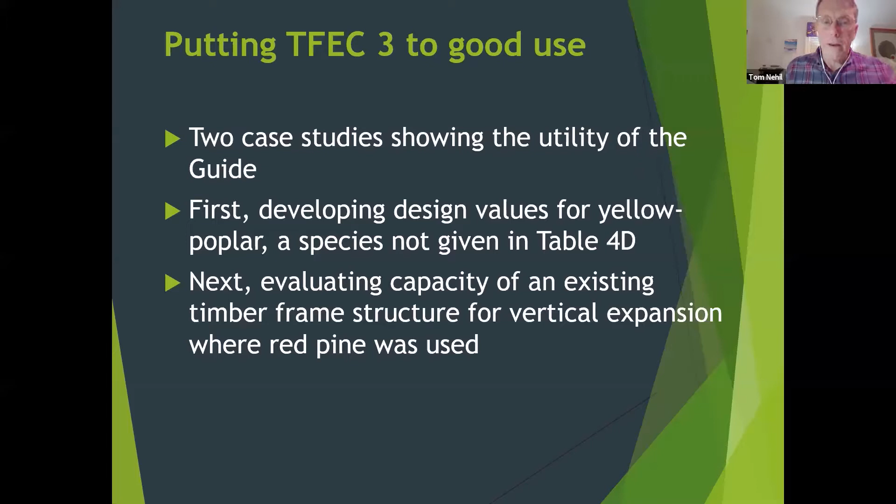Now, the other case study we've got is looking at the capacity of an existing timber frame structure that they wanted to add more load to. It happened to be red pine, although we didn't know that when the project started. So we'll be using some different parts of TFEC 3, I'll call it, in that presentation.

In the first case that Dick will present, we'll be looking at yellow poplar as basically new timber, generic, not yet in use, coming from the mill. We'll leave open the possibility that it could have seasoning. It's not necessarily green, so we'll examine that. Then in the second case study, we'll talk about species ID and grading in situ, and then determining design values from there.

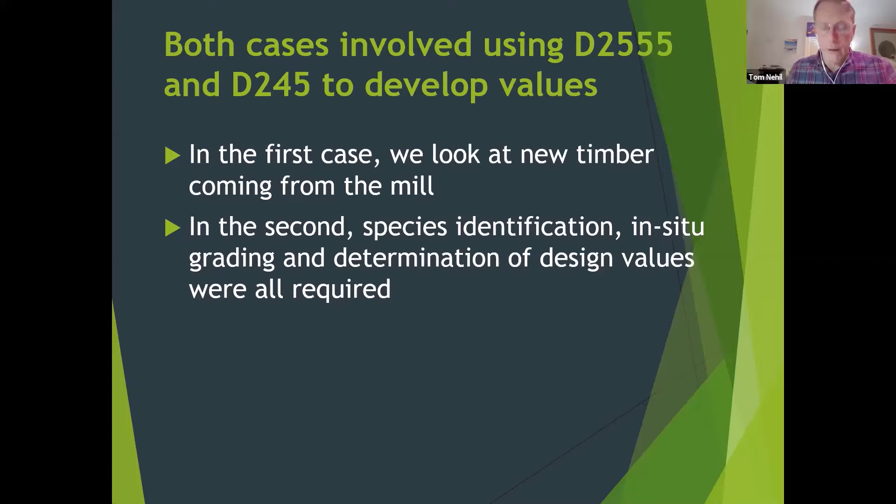So for those of you that are not real familiar with TFEC 3 yet and using D245, let me just set the stage for a minute and provide some structure to our presentation this evening, and then we'll get into the real detail. So D245 is a standard developed by the Wood Committee at ASTM and provides a means for developing design stresses for visually graded timber. And it's the basis for what you see in the NDS supplement. In fact, it's kind of behind the scenes there.

Why we want to use it ourselves is that it, first of all, provides a code recognized way of getting design values for some species like yellow poplar that you can't get in the supplement. So it is a tool for that purpose. Secondly, it allows you to pull out individual species from a species combination. In the supplement, you find most of your various species of wood are grouped together, clumped together. For example, all the maples are lumped in mixed maple. Well, there's hard maple and soft maple, and hard maple's better. So if you know you've got hard maple, this is a way to develop design values that are a little better than what you would find in the supplement.

And then finally, the method of TFEC 3 and D245 gives us a way of taking advantage of the really good quality timber that's often found in these older buildings. So we can get values that are better than Select Structural.

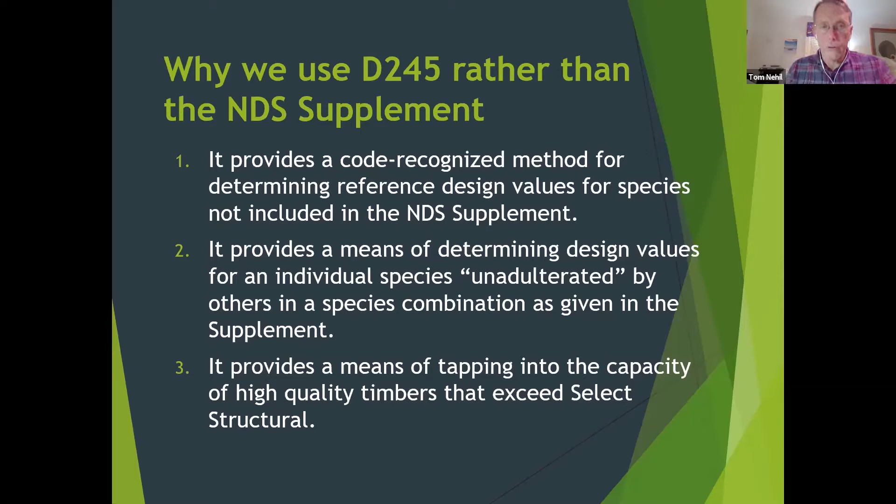So how does all this get going? Well, it starts by having strength values, and the strength values are derived using standard testing methods. And so ASTM D143 is the official test methodology for getting those strength values. This kind of sits there behind the scenes, but it's the basis for doing a whole bunch of testing on a bunch of different species and developing a sufficient number of tests for each species that you are able to get some statistical data. And wood is a statistical material. You know, no two pieces test out quite the same. So fortunately, all that test information has been compiled and reported for us in D2555.

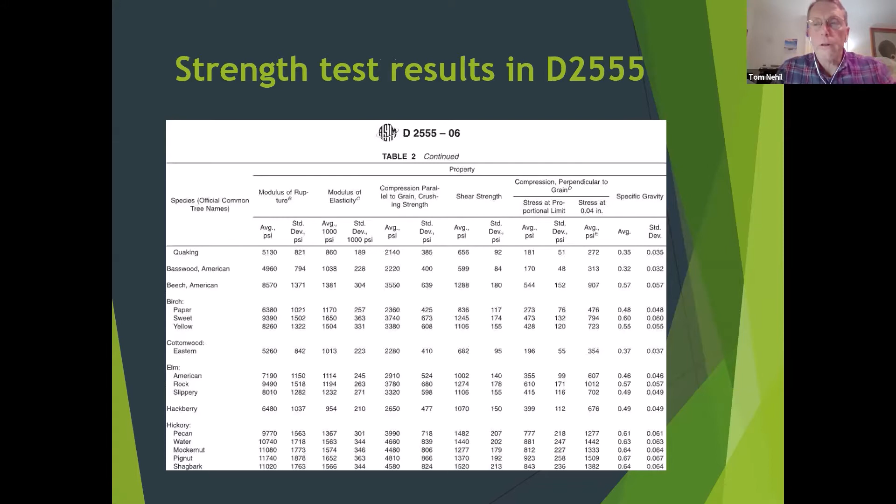So for any given species, you can find the average strength and the standard deviation of that strength value for all of the design mechanical characteristics we're interested in, like breaking, modulus of rupture, shear strength, compression parallel, and so forth.

So then you go to D245, and that basically is your operating instructions. It tells you how to take that strength data and turn it into design values. The rules of that game are kind of messy the way they're presented in D245, in my opinion, but it is basically a simple process. And it's these 5 steps.

You go to D2555, you get the strength data for the particular species you're interested in. Maybe it's basswood. With your average and your standard deviation, you're able to calculate the 5th percentile exclusion limit, which is kind of that lower bound of strengths that were found in testing. And that's what we use to develop our design values.

From there, you apply an adjustment factor to adjust to normal load duration and get some safety factor in there. Step 4, we apply strength ratios to account for grade characteristics like knots and slope of grain. And then finally, if there are other modification factors that apply, we can use those if it's for wet service conditions or size factors and so forth. So that's the framework of using D245.

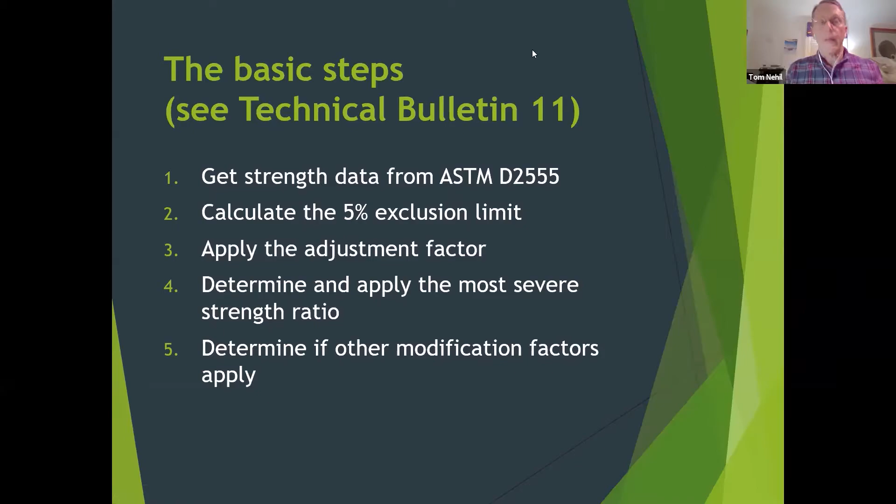And now Dick can take us into some of that real detail and show you all how that can be put to use. So Dick, I'll let you share your screen and take it from there.

Okay, thanks, Tom. Can you see my screen, Tom? Yes, I can. Thanks. Okay, good. I assume everyone else can then.

So, yeah, ASTM D245, pretty compelling reading. Do it during daylight. But it is important, if you're going to follow this process, that you understand what's in 245. And as an introduction to that, I would encourage you to look at the Engineering Council's Technical Bulletin 11, and you can find that on the Guild website.

So my motivation for getting involved in this process was several years ago, I was called upon to evaluate barn timbers. It was no longer a barn, it had been disassembled. A client wanted to move it from Indiana to Colorado and put it up as an event center, a wedding barn. So we're looking at somewhere between 100 and 125 pieces of timber.

And I read Tom's Technical Bulletin 11, and I saw Tom's presentation on this method he developed when he presented at the latest Mount Hood conference. That was like 3 or 4 years ago, and concluded it's a detailed process. It's not real complicated to do one stick, but if you're going to do 120 of them, you're going to need some automated method for organizing it. So that got me involved.

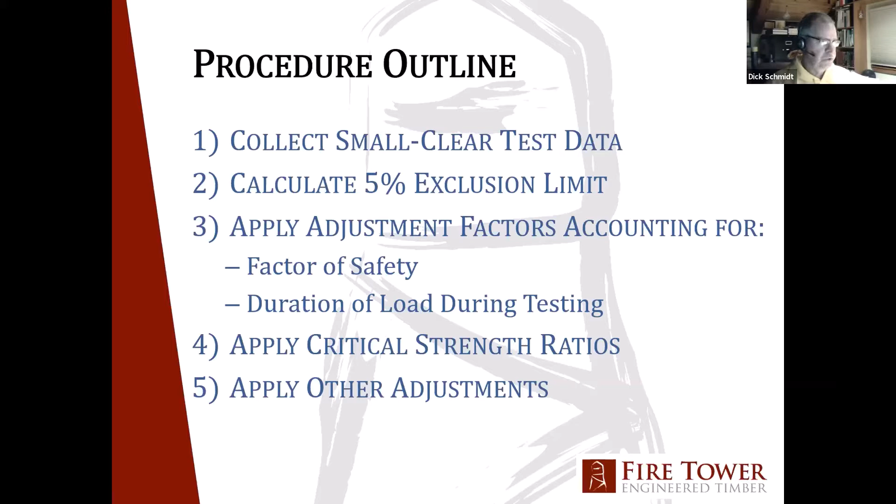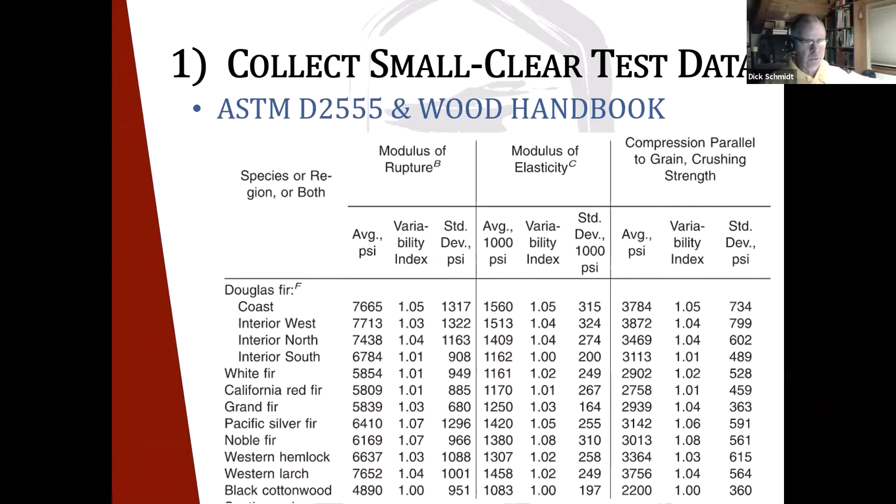So again, here's your sources for the small clear test data. Focus on the average value and the standard deviation. Those are the two numbers that you need for each of the material properties: bending, modulus of rupture is bending, modulus of elasticity, compression parallel, compression perpendicular, shear.

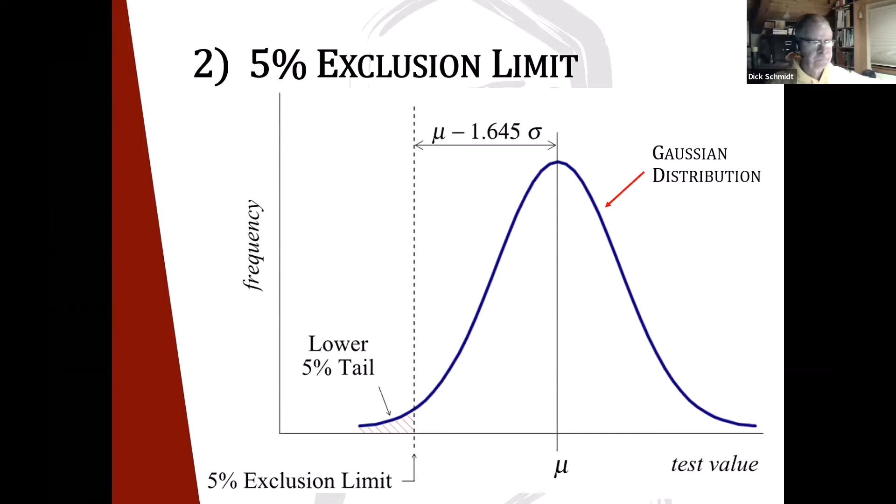Apply the adjustment factors. These are in D245 table 8. And for softwoods, for bending, we divide by 2.1. Divide our 5% exclusion value by 2.1. For hardwoods, divide by 2.3 for bending. For modulus of elasticity in bending, we divide by 0.94, which actually increases the value.

And that's due to some peculiar characteristics of the test procedures, the small clear specimen span to depth ratio versus a typical bending member. And then you can look at the rest of these when you are reading D245.

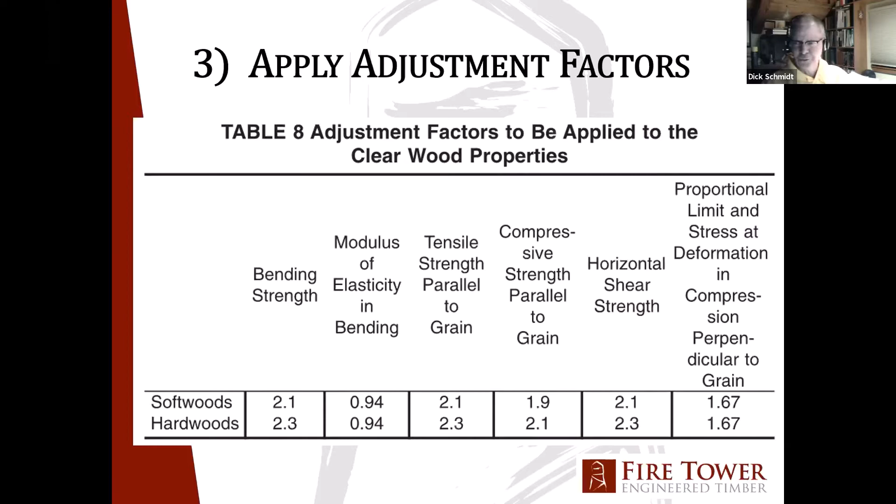Apply the strength ratios for knots. Table 2 in D245 has strength ratios. For instance, if I'm looking at knots on the narrow face of a bending member, I've got a 4-inch wide member and a 1-inch knot. My strength ratio is 78. And what that means is 0.78 is a multiplier that I use on my design value. Or I've lost 22%. The knot has reduced my capacity to 78%.

These tables are a nuisance to try to use in any automated fashion. But fortunately, the annex has equations that give you roughly the same values. So X1.1 is knots on the narrow face, and the equation we use there is shown in blue there for a 1-inch knot on a 4-inch wide face. I calculated 78.1, so essentially the same number.

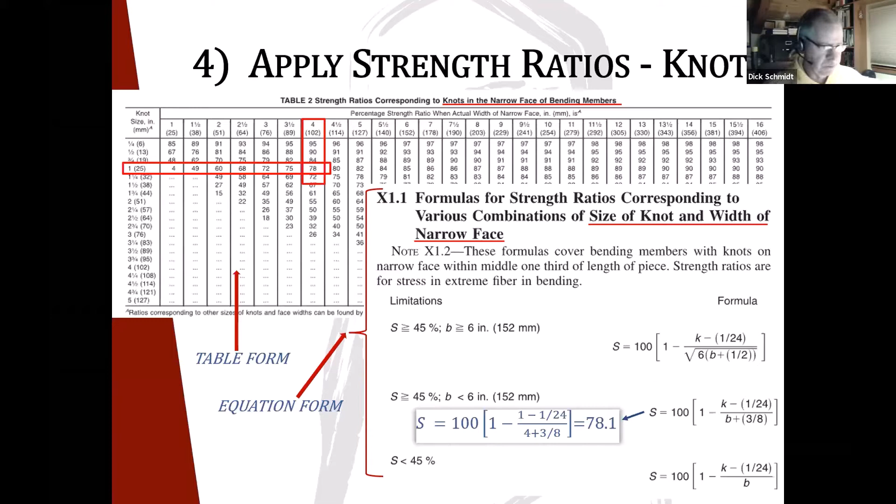The strength ratios for slope of grain are listed in table 1. And for a select structural beam and stringer, the greatest slope of grain you can have, or the limiting slope of grain, is 1 in 14. The strength ratio for bending is 74, and for compression parallel to grain is 87. So very similar to the knot size number for select structural.

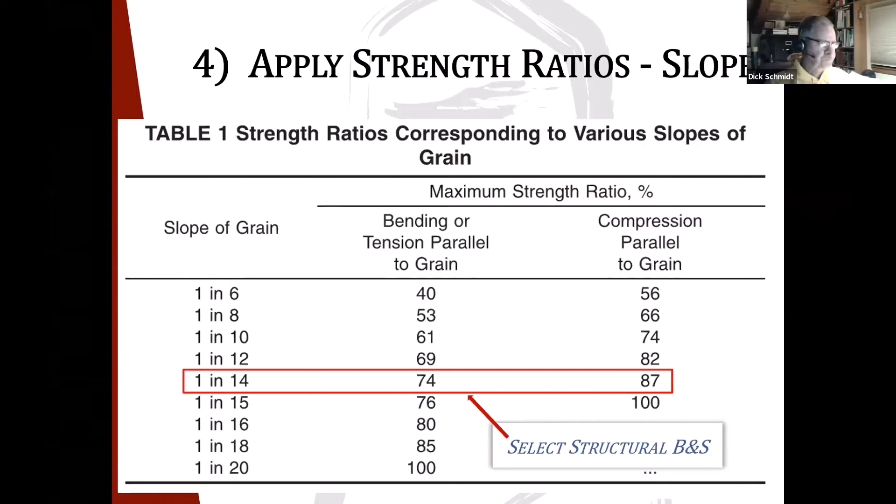Strength ratio for shear. There's a lot of reading on this. I'm not going to give you the time to read it, but the point is, just look at the first line. Strength ratio of 50% is used for shear for shakes, checks, splits, and also accounting for some of the nuances of the test procedure versus in-service performance.

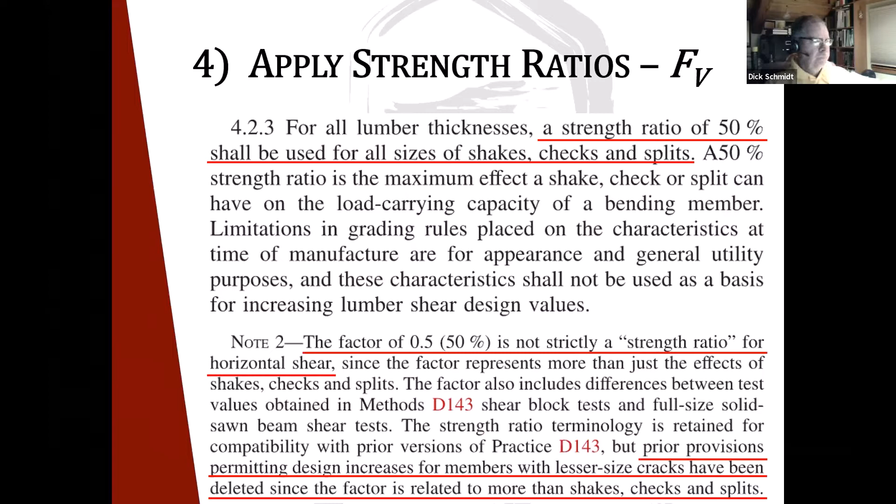Other adjustments: the modulus of elasticity is modified by a quality factor. What that means is if you've got a timber with a relatively low strength ratio for bending due to high slope of grain or large knots, the stiffness is actually lower than for a better quality stick of the same material. So you have a reduction in the modulus.

Tension parallel to grain, it is always 55%. That design value is 55% of the bending value. And the reason there is when you apply tension to a member, you're stressing the entire cross-section, exposing more strength-reducing characteristics to stress and potential failure than you would be in a bending situation.

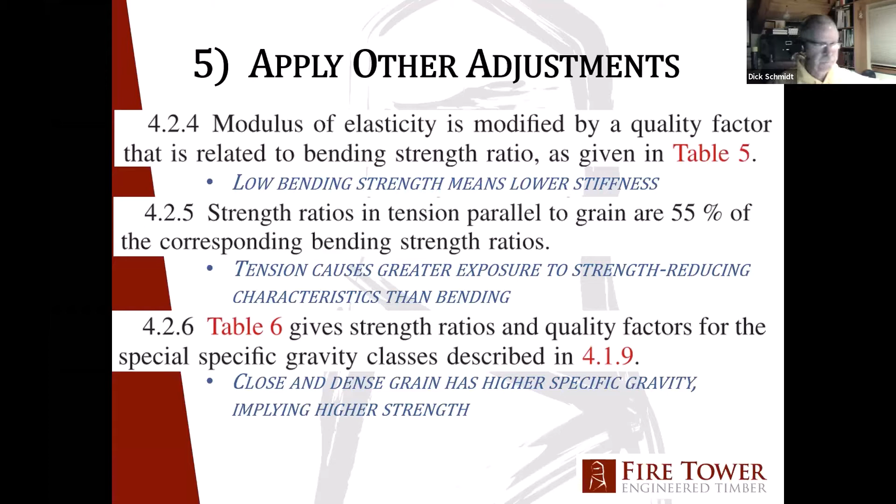Specific gravity classes for close and dense grain allow you to increase your design value, for instance, dense Douglas fir or dense southern pine. So those are given to you in table 6, and those can be significant too. So these are the quality factors for modulus, table 5. These are the adjustment factors for close and dense grain. And I'm going to skip over these; I'm not going to spend any time on it.

Incidentally, I will point out they apply only for Douglas fir and for southern yellow pine. Don't try to apply them to a dense true fir or eastern white pine or any other material like that. They depend upon both ring count, number of rings per inch, and the percent of late wood. So you can't just count rings. You also have to evaluate how much late wood you have in the cross section.

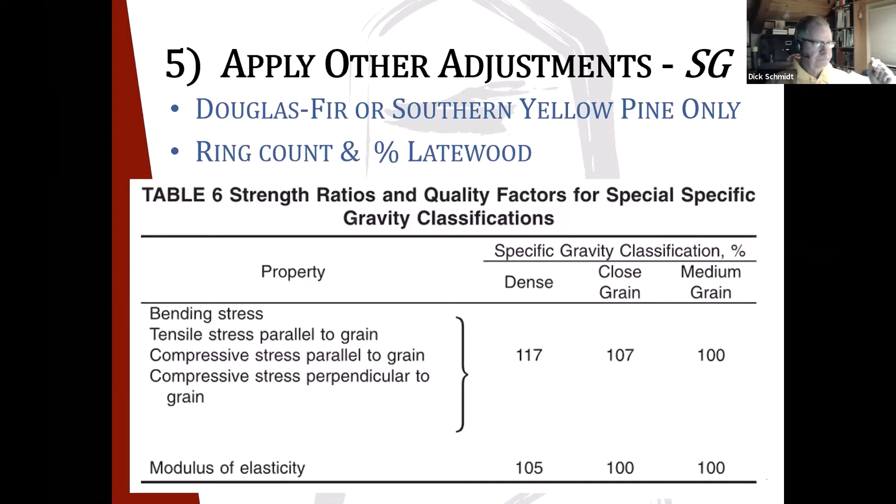Okay, here's a big one. Now, if you're working with seasoned material, then you're permitted to increase the allowable properties from the green values based upon the moisture content. So for bending, for instance, you can take a 25% increase in your bending design value if your timber or your stick of lumber is at 19% moisture. You can increase it by 35% if you're down to 15%. So we've got two numbers here, or two data points, 25% at 19, 35% at 15.

I can draw a straight line through those and write an equation of that straight line and then evaluate, well, what if I'm at 12% or at 16.5%? Then basically the idea is I can come up with a C sub M, if you will, for any moisture content. So moving on with that. That should be exciting. So, okay. That's one of the take-home messages for this presentation.

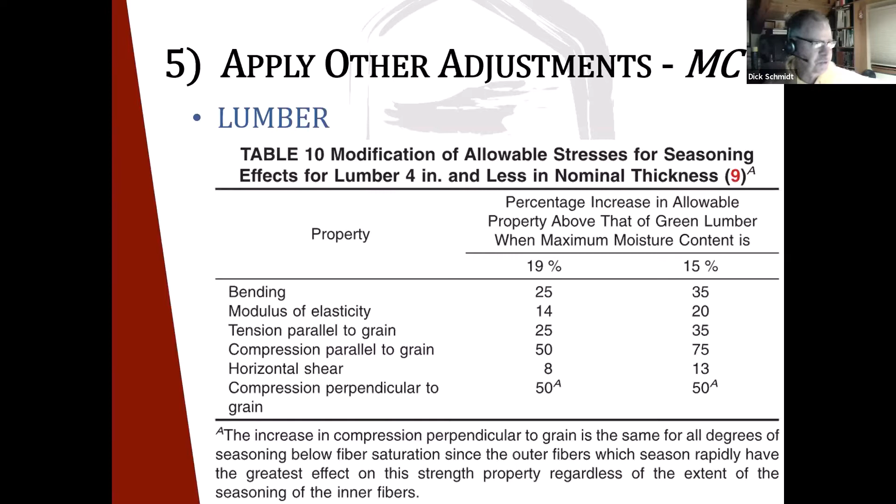So that straight line for bending has a slope of 2.5. That is, for every 1% change in moisture content, I get a 2.5% increase in my design value. Likewise for tension, for shear, 1 1/4, and so on. So that column under that rate column is taken from Table 10 in D245.

We've applied a lower limit of 10%. If the equilibrium moisture content is 10% or lower, that's the shelf or the bottom at which we're going to make these adjustments. Because if you go any drier than that, you really don't get any additional increase. And that's based on research that Ron Anthony has done. Incidentally, the lumber moisture content, in green condition, we assume fiber saturation point is 29%.

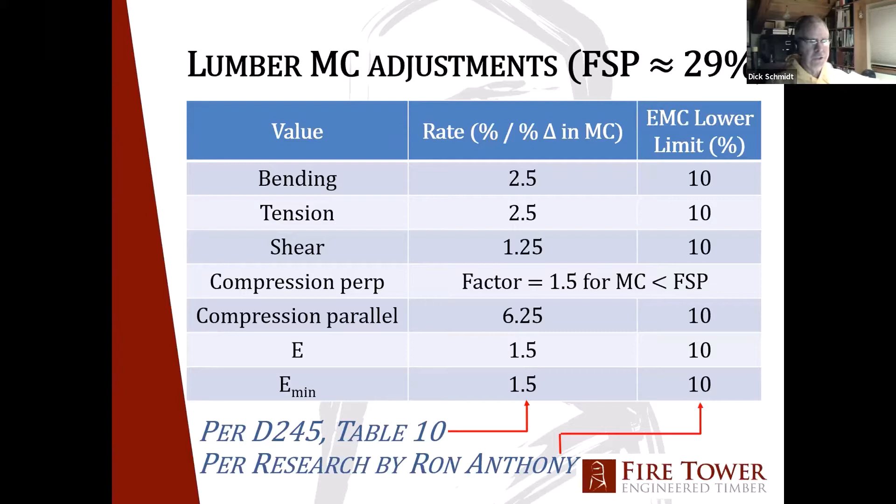For timber, we're going to make similar adjustments, although D245 says you don't make adjustments and then it contradicts itself later. We're going to make adjustments. We're going to do 4% change in the bending strength for every 1% change in moisture content, down to an equilibrium moisture content of 10. And then all of these numbers are based upon Ron Anthony's research.

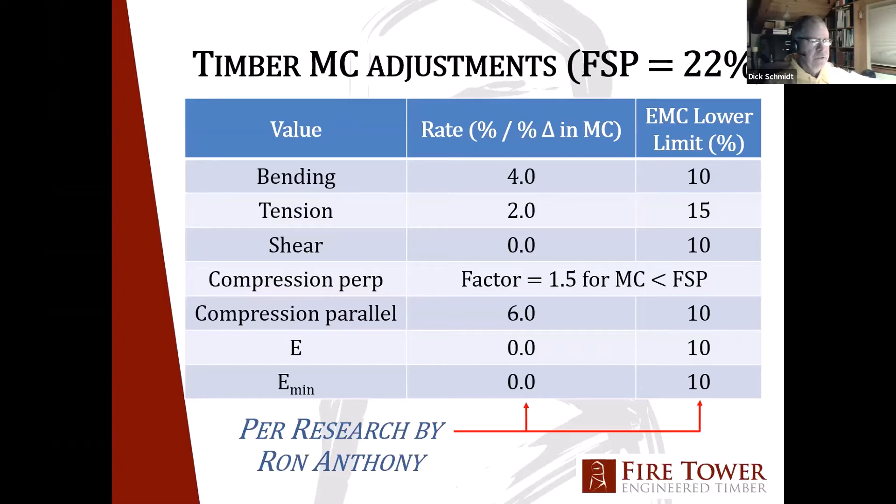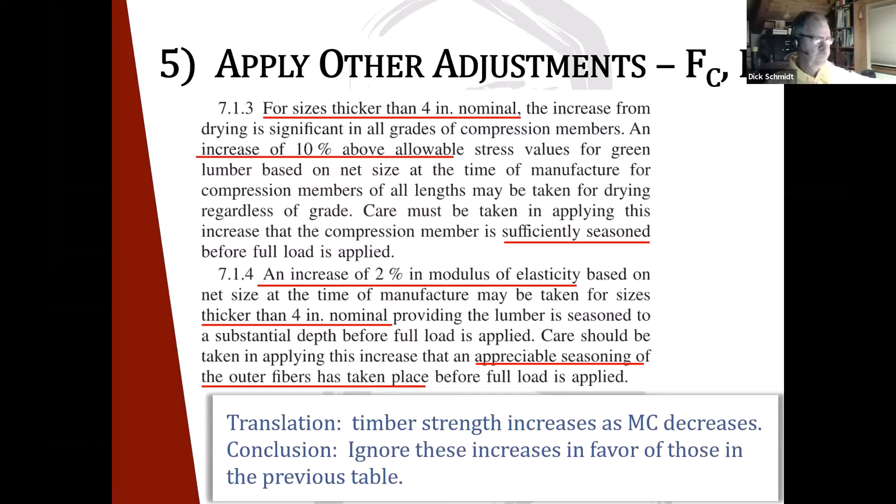So other adjustments for compression parallel and for E, section 7 of the standard talks about that. If you translate the black text into blue, it says timber strength increases as moisture content decreases. Okay, that's the good news, and we can exploit that. So the other adjustments are, the size factor C sub F is equal to 2 divided by D, D is the depth of the stick you're working with, to the 1/9 power.

The 2 is there because in the D143 test procedure, you're breaking a 2x2 cross-section stick. And if you're using a 12-inch deep stick, obviously you've got a greater dispersion of knots, greater opportunity to account for that. Always include that. You always want to make that adjustment, or you're going to be over-predicting your strength. That's for bending only, right? Or you're going to be on the wrong side. Incising, load duration, temperature, all of these things that we normally do when we do design, then you obviously make those same adjustments as they're appropriate.

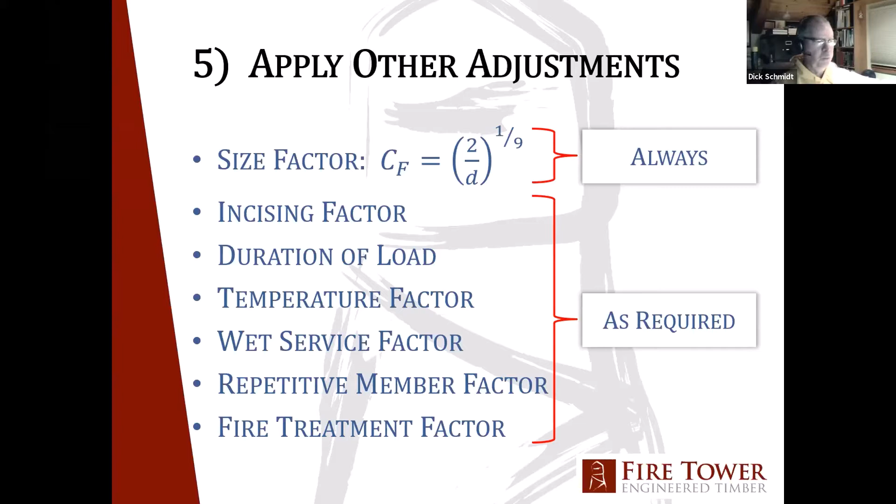So a summary, in order to calculate F sub B, your reference design value for bending, start with the modulus of rupture, reduce that by 1.645 standard deviations, divide that by the adjustment factor of 2.1 for softwood, 2.3 for hardwood, multiply by the controlling strength ratio, either knots or slope of grain. C sub F is the size factor, and then C sub M is your moisture adjustment. And you're done. So 2 minutes, and you've got that number knocked out.

If you only want bending. If you want all the others, there's 5 other values that you can calculate. They use roughly the same procedure. And then if you got 120 sticks, you need a way to automate this.

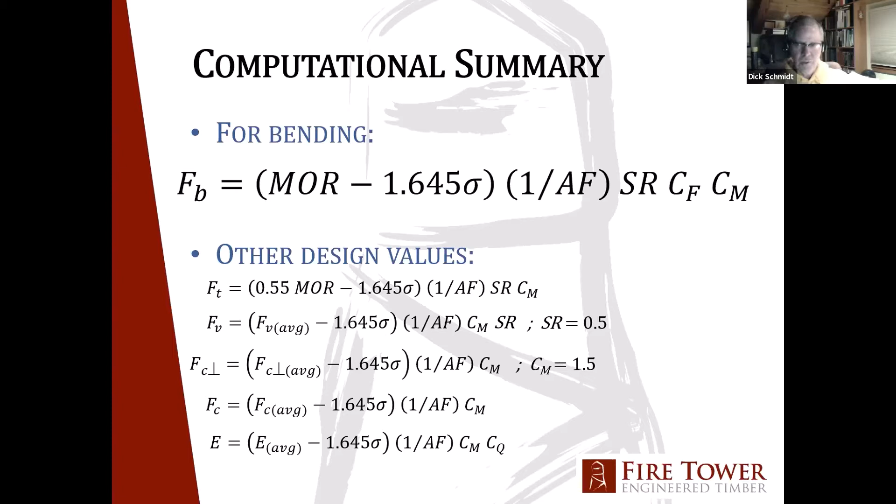So let's look at the sample design values for yellow poplar. And why yellow poplar? Well, because Jim Rogers needed the numbers. He sent out a broadcast email some time ago to the Engineering Council, and he got some feedback on it. And one suggestion was just use eastern white pine. Well, you're going to pay a penalty if you do that, because yellow poplar is substantially better than you're going to get out of eastern white pine.

So here's what I've done. I'm going to assume that I've got a 6x12 beam and stringer or a 12x12 post and timber. I'll use the NELMA, Northeastern Lumber Manufacturers Association, limits for knot size and slope of grain. And I'll assume a moisture content of 12%.

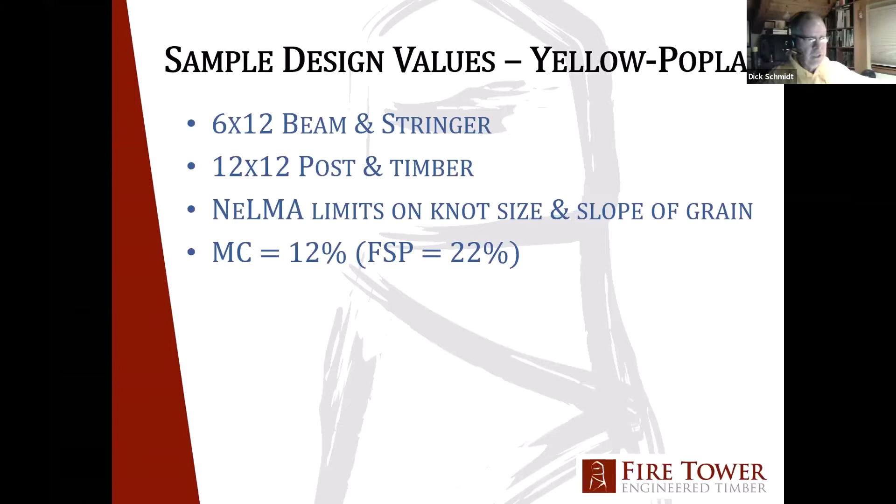We assume the fiber saturation point for timbers, again, based on Ron Anthony's research, as 22%, not as high as 29. The testing work that was done on timbers to actually break full-size timbers to get the data that we use in Table 4D averaged around 22%.

So here are the knot sizes and slope of grain limits based on the NELMA standard. For a select structural beam and stringer, the edge of the wide face can have a knot that's 2 1/8. The center of the wide face, 3 1/8. Slope of grain, 1 in 14. Post and timbers, 2 3/8 anywhere on the wide face. Slope of grain, 1 on 12.

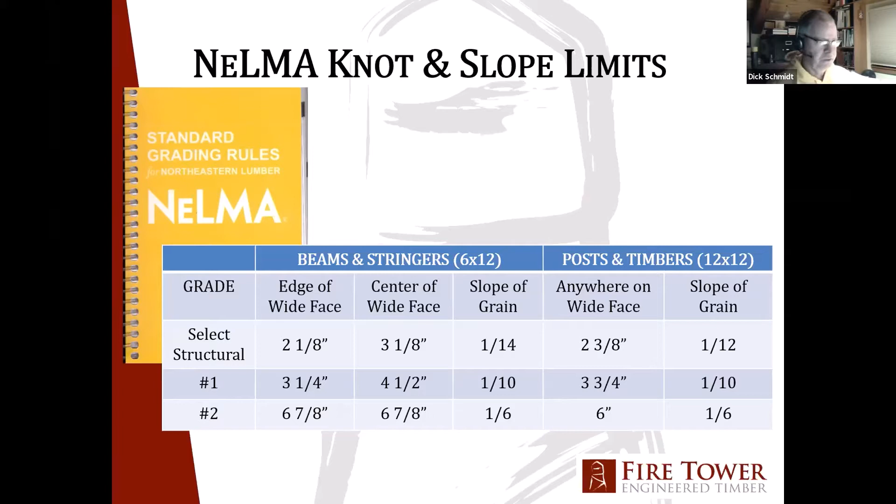Let me call your attention to a number 2 post and timber. Our timber is 12 inches deep, nominally. I can have a 6-inch knot all the way through that timber. 6 inches across, all the way through, and still call that a number 2. I'll leave that for you to decide if you want to use that stick.

Okay, so here are the calculations. The modulus of rupture for yellow poplar is 5950. Standard deviation is 952. Adjustment factor as a hardwood, 2.3. My size factor is 0.819, so let's call that 0.82. You'd be 18% unconservative if you forgot to use the size factor. The moisture content adjustment is 1.4, so I got a 40% bump due to moisture content.

On the right side there, my strength ratios for the 4 quantities, I have 3 knots and slope of grain. The edge knot at 2 1/8 is controlling, 0.694. Cram all those into my equation, and I calculate a bending value of 1500 psi. If I overlook the moisture content adjustment, assuming that I've got green timber here, then take that out and I'm at 1100 psi for the bending value.

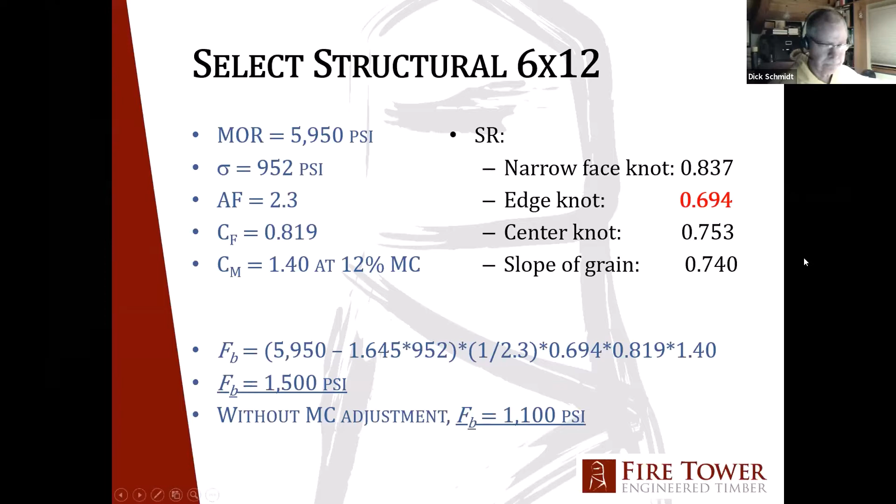Okay, so the computational tool I put together based on Tom's work and his inspiration looks like this. It's a big spreadsheet. The blue cells are your input. The pink cells are interim computations, if you will. And then down at the bottom, the tan is the output, the final values.

Let's see, so this particular sheet is for a 12 by 12 cross section. It's classified as a timber since it's 5 by 5 or larger. I picked US and Canada as a source. Incidentally, notice the N next to the Canada. In the pull down menu, any material that comes from Canada has that N next to it, meaning north. That's the code that's used in the NDS supplement, so I duplicated that.

So I picked yellow poplar. The strength data from D245 is listed here, all the characteristic data. Calculated values follow, and then down at the bottom are my design values. Again, this is my post and timber 12 by 12, and in this case, I've got 6-inch knots everywhere, and I've got a slope of grain of 1 on 6.

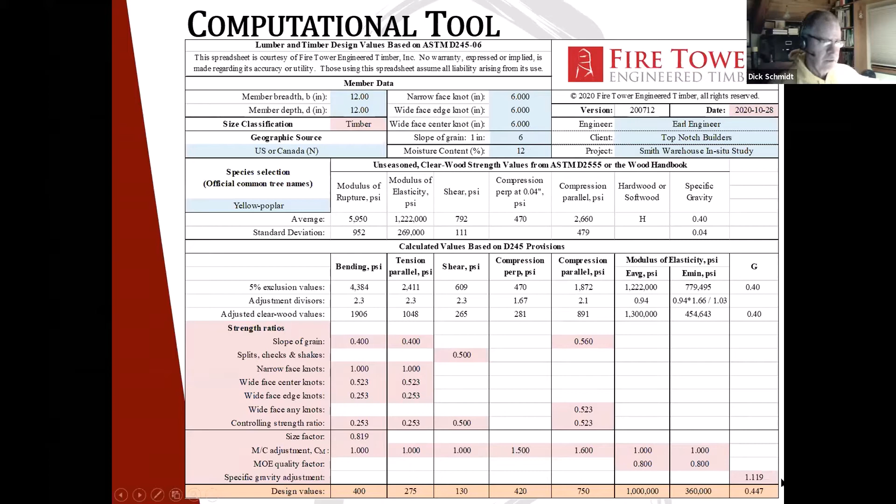The scope and limitations of this worksheet. It's based upon data in D2555 and the Wood Handbook, based on green, small clear specimens. The D245 strength ratios and most other adjustments are used directly. Not included are the adjustments for close and dense grain, because we don't always have southern pine or Douglas fir. And if you're doing an in situ study, you're not going to be looking at end grain very often. You don't see the ends of the timbers very much.

The objective here is not to duplicate the NDS supplement or the in-grade program for lumber, but to come up with values that are not supported by the NDS, or that are not in the NDS supplement. In a lot of cases, the numbers are very close. If you want to make a comparison, fine.

But the point here is, as Tom pointed out, the real value is if you know the actual knot size and it's smaller than that 2 1/8 for a 6x12 beam and stringer, you can exploit that. If you've got a material that's not the weakest in the species combination, you can exploit that. Okay.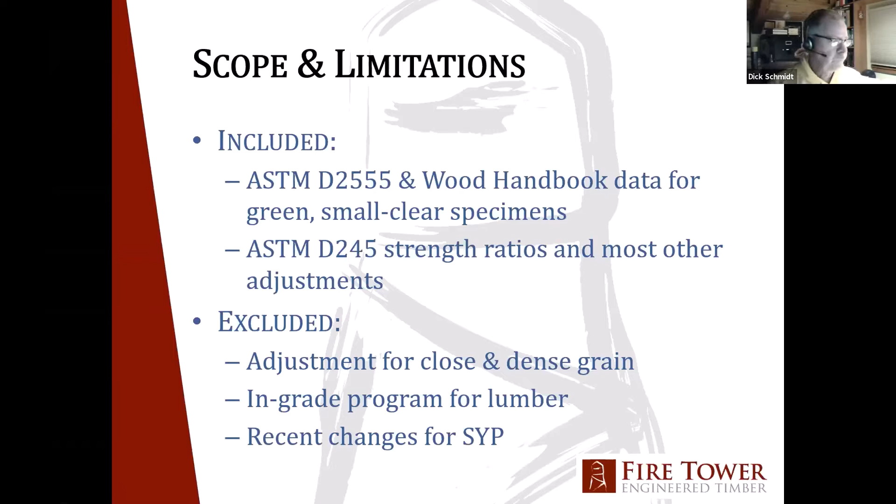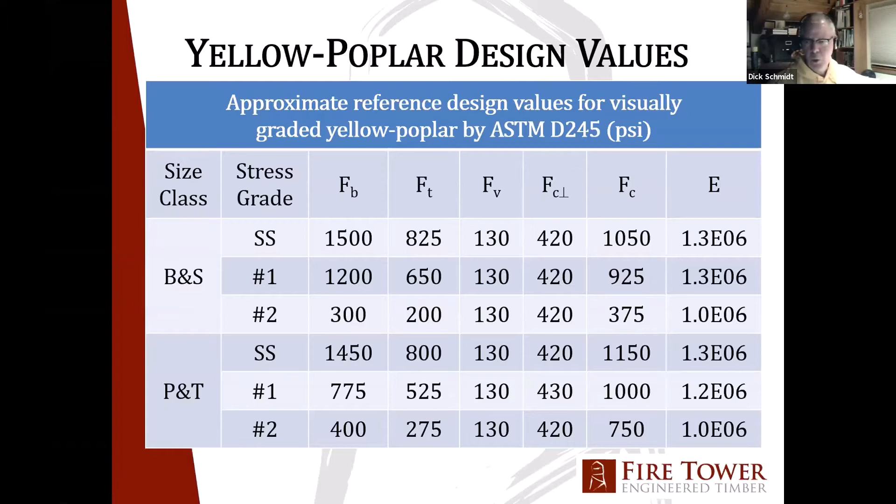So let me pause for a moment. I want to drag this over. Okay, am I still sharing that screen? Can you see the spreadsheet? Yes. Okay, here's the spreadsheet.

In this case, I've got the 6x12 timber with the knots and slope of grain corresponding to select structural beam and stringer. Let me change my moisture content to 22%, and there's the adjusted design values. So it's that easy.

All right, spend another few minutes here. Strength ratios for slope of grain, I've got them in based on an integer format. They're not in equation form.

For moisture adjustment, bending, tension, shear, compression perp, compression parallel, E and E min, all potentially different for timber and for lumber. Fiber saturation point for timber is 22. For lumber, it's at 29%.

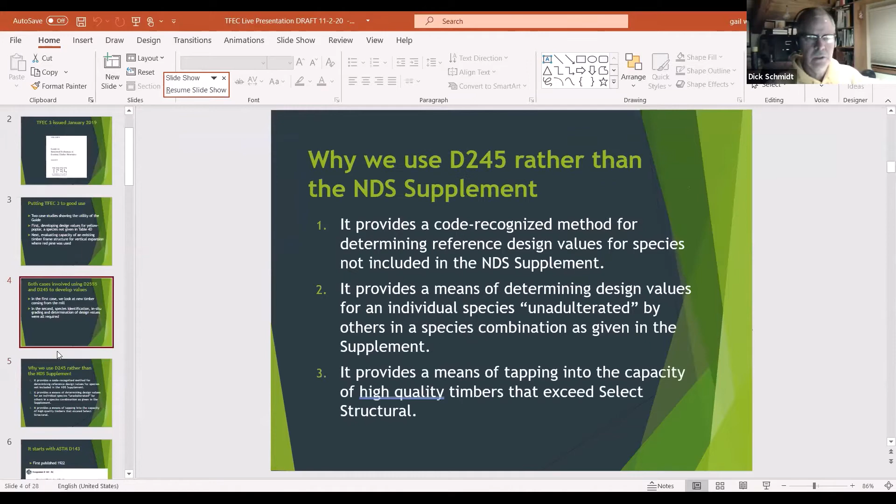All right, well, let me jump down here just a little bit. Oh, can I jump in for just a second? If we have time at the end, I'd be glad to go through a live demo of the spreadsheet, if there's interest in looking at other design values, other materials. We could play around with knot size and see how that affects things. Great idea.

Are you doing questions at the end or throughout? Let's go ahead, David, and jump in since Tom hasn't really started yet. Okay, sorry. Just curious, it was fantastic. Where do you get the standard deviations? Is that because you've done testing, or is that listed somewhere?

That's also listed in D245, or also in the Wood Handbook. So both the mean values and the standard deviations for the green small clear specimens. So it's a pretty good statistical basis. And in fact, that 1.645 multiplier is used in statistics if you have an infinitely large sample, assuming that you've got a perfect bell curve. But that's what the standard D245 says to use, so that's what we're doing.

Let me add a comment there, Dick, that the standard deviation is not given in the Wood Handbook. So David, if you do happen to use values from the Wood Handbook for some reason, like you're looking at black locust, read Technical Bulletin 11, and it will give you some guidance on the appropriate standard deviation to assume for the various strength values. They happen to be very consistent throughout. They're basically assigned for most species. So that's a good point.

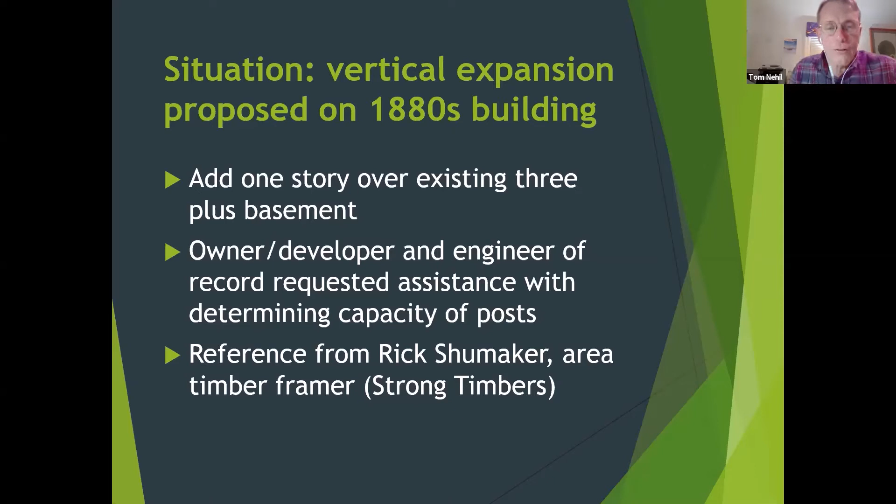I actually got the reference from Rick Shumaker. Rick's a timber framer up in Traverse, and he is with Strong Timbers. And so they talked to him, and Rick's in fact been through our timber grading training workshop, and he knows the stuff, but the engineer working on that project was not comfortable with the idea he was going to be consulting with a carpenter on values like that. So Rick told him to get a hold of me, and so I got involved thinking I could maybe add a little something extra as well.

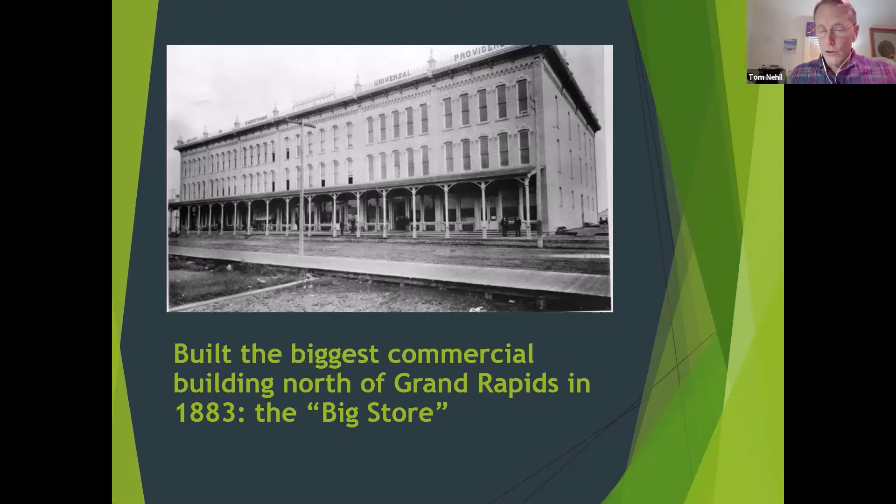So back to the story. They wanted to know whether the posts were strong enough. And of course, my questions to them were, well, what kind of wood have you got? And what kind of service stresses are you talking about here? What sort of strength do you need? Well, they did not know their species, and of course they didn't know the grade. But the crazy thing is they had not even run the loads, or they really hadn't developed any kind of a picture of how strong the wood needed to be to do the job for them.

And that's backwards. Before you waste any time going out worrying about your species and your grade, you ought to at least know whether you have something that's either a no-brainer or unachievable or somewhere in the middle. So if this guy had calculated that he needed 3,000 PSI F sub C, in other words, axial compressive stress, you could have told him, well, you don't need me. It's not going to happen. You can't get there. And similarly, if the loads were light, if he only needed 300 PSI, there's no reason to worry about what kind of grade or species you have, because everything's going to work. If you're in that gray zone, you need 1,000 to 2,000, something like that. Well, then, yeah, it's worth investigating.

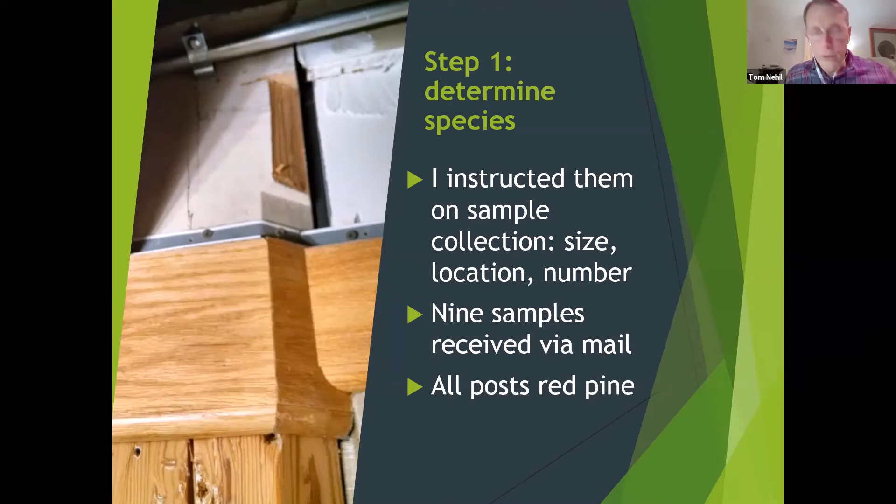And so they did this in various locations and sent me samples through the mail so we could get a jump on this thing. And I looked at the samples and did my own identification, and I determined they were all red pine. So ducking off into the species ID world for just a moment, the question is, how did I know that, right? So here's a little bit of a taste teaser, shall we say, on what's going on when you're looking at wood identification.

One, of course, I looked at the color and the unevenness of the grain, which, you know, red pine is something like hemlock. It's what they call moderately uneven. You can distinctly see the dark wood, the late wood, as different from the early wood. So it's easy to count the growth rings because you've got a nice dark line at every summer growth period. So hemlock and red pine look similar in that, but red pine has a very sharp odor that hemlock does not have. So it's definitely kind of a turpentine resinous odor that distinguishes it.

If you pulled out your little 10x handheld magnifier and looked at the end grain on the red pine, you would see resin canals, little dots, you know, where the resin resides, you might say. Hemlock does not have those, and maybe that's why it doesn't have much smell either. But beyond the gross characteristics, we can also dig into some of the really microscopic anatomical features of the wood to make a more definitive determination of the species.

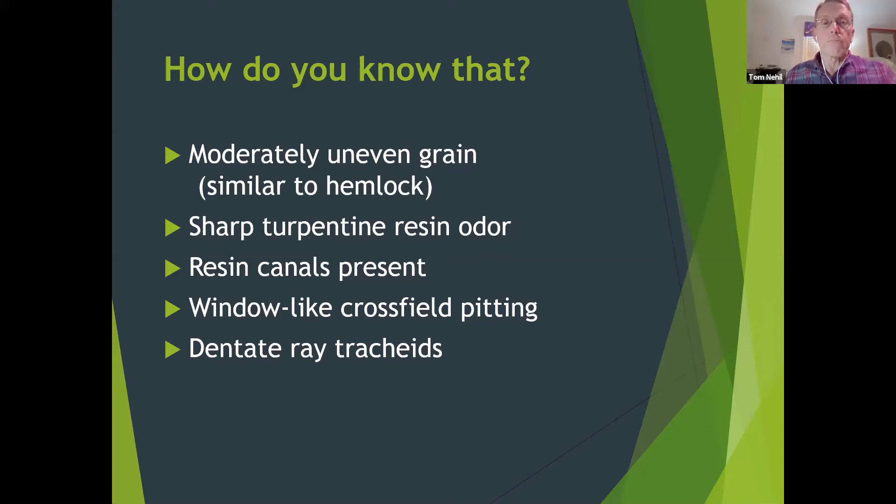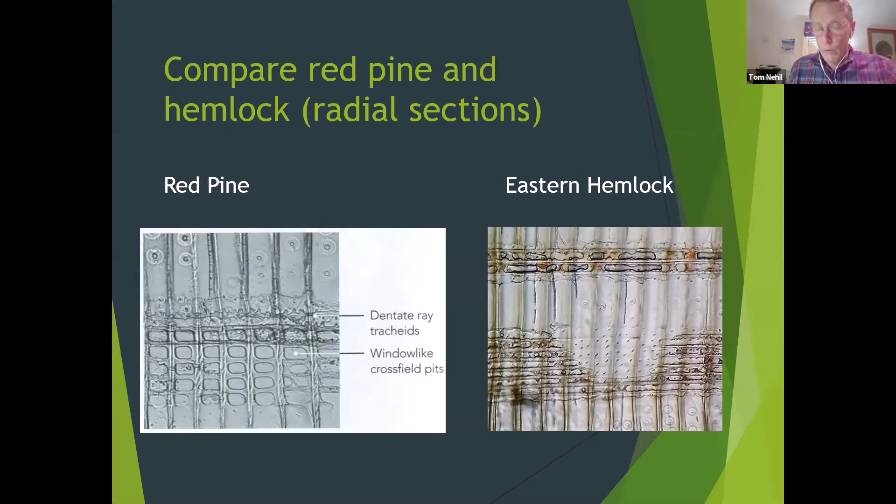And so I got in there and gave it the visual review and determined that the grade was completely awesome in this building. It was the best red pine I've ever seen anywhere. And I've seen some good stuff, but this was incredible. Those guys, those lumber barons picked out the best of the lot for their own building. The grain was so straight that there was nothing to measure. I mean, call it 1/16 or 1/18, anything would be reasonable. It was dead straight. I could not find a knot. It was just clear material, really wonderful stuff.

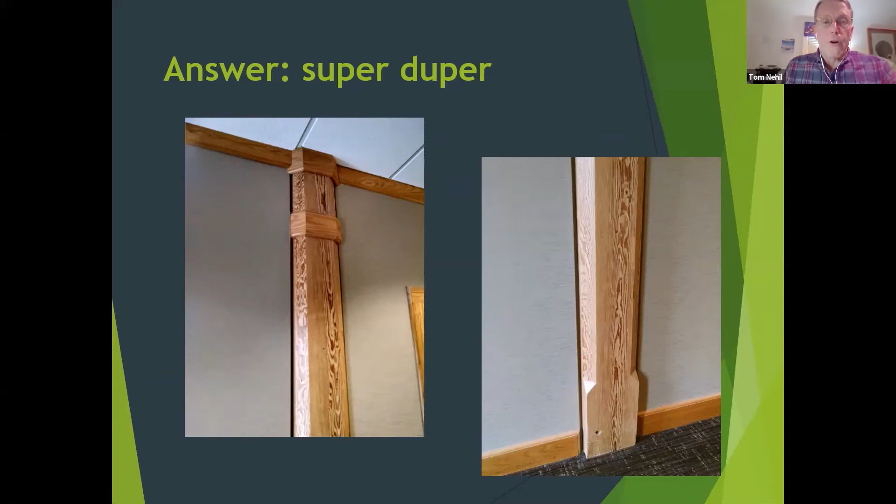Because I could not see all sides, you know, every surface of these timbers, I looked around the building where there were other posts that were exposed on all 4 sides, so I could get a better sense of the consistency of the quality in this building, so I would know whether to be concerned about what I couldn't see. Really about the same thing on all levels throughout the building. I had to walk around all 4 sides of these posts to even try to find a knot. There were very few knots. It was the clearest red pine I've ever seen.

If I did find knots, they were maybe 1 inch, 1.5 inch diameter at the surface. And this is box heart timber. So if you read Dick Schmidt's article in Timber Framing here, just 1 issue back, I think, you'll know that the effective size of a knot like that is much smaller.

The displaced area due to that knot is only roughly 1/3 of what you measure as a size at the surface. So these were, for practical purposes, knots that would be called 1/2 inch knots or even smaller when you're looking at the grading rules. So clearly much better than Select Structural.

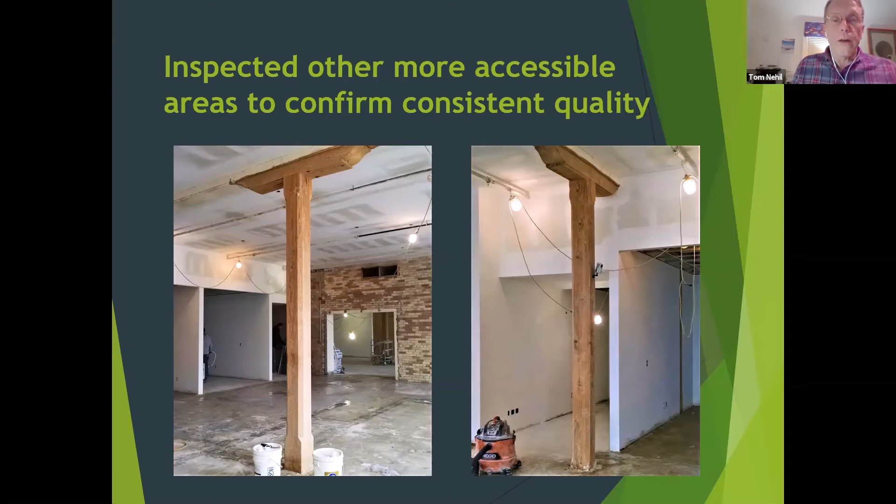So with that information, it was time to get my reference design values. Red pine is in the supplement. I could go to the supplement and take those values straight out there. For Select Structural, I would be safe. But I'm in the habit of using D245, so I do it anyway, as a matter of fact. And knowing that I had something that was better than Select Structural, it was going to make sense here.

I learned something about red pine that I had never really considered before in the process. I developed my design stresses. I think it must have been 2 different sit downs. And the second time I went to take a look at my calcs and compare what was in the book, I didn't have the supplement with me. I just had the NELMA grading rules, and NELMA has the design values included at the back of the grading rules book. So I went there and I noticed that the numbers were not the same as the numbers I had jotted down from the NDS supplement. They were higher by 10–15%.

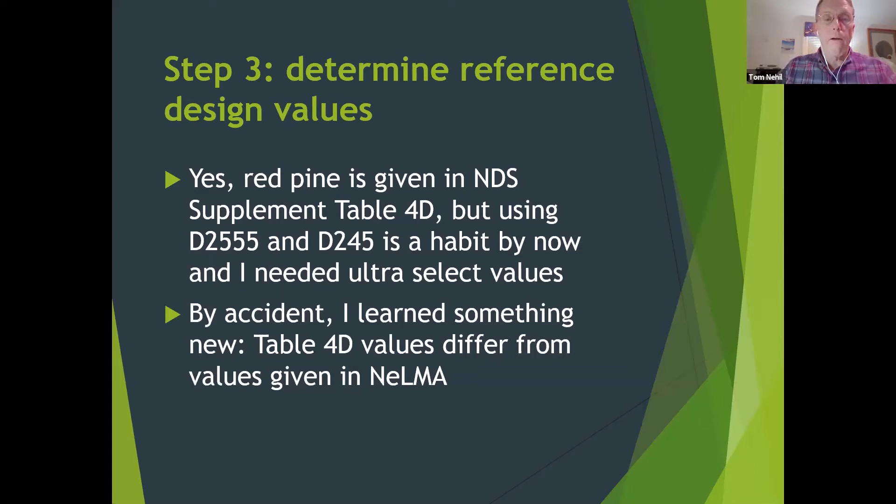So I had never really considered the fact that the values in table 4D, if you look in the right-hand column, you'll notice it tells you that they are per the NLGA, the Canadian Lumber Grading Agency. Well, you know that the Canadian values for Doug fir are better than the Doug fir South. I guess I kind of thought maybe red pine was the same way, so they just gave us the good stuff. Well, no, NELMA, the values that they list for red pine are based on a different test set. The samples were sourced in the USA. Somehow they're better, they're stronger.

Those values are given in D245 in their table 2. Table 3 is for Canada, woods grown in Canada. And if you run the numbers, you'll see that the values given in the NDS supplement can be derived by using the table 3 values. So clearly it's a Canadian data set.

I don't know why we don't see both in the supplement, just like we see both Canadian and Southern Doug fir. Why wouldn't we see a Northern and a Southern red pine? But we don't. I have not been able to get an answer from AWC or anybody about why we don't, but now you know. And if you feel confident that you have old line red pine from the US, then consider using those US values.

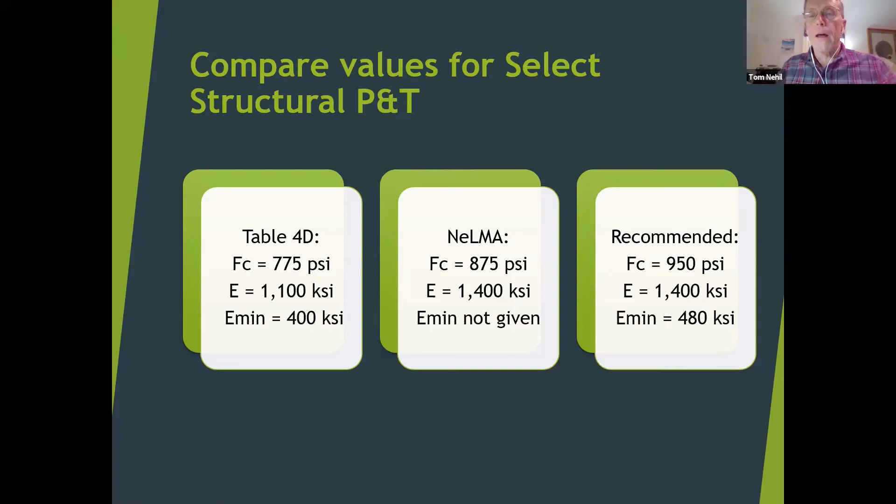I did not take any big bump for moisture content, and I could have, because that timber was bone dry. Easily 12% would have been fine. So I just took the 10% increase for dry service conditions, but otherwise treated it like a green timber. And I did that just to kind of feel out the client, essentially, the engineer. As it turned out, they were satisfied with what I gave them, and I didn't have to go really out on a limb suggesting that we use a moisture adjustment, but I would have been comfortable doing so.

I think it's reasonable, because D245 suggests that you not do it, because if you take a green timber and grade it and give it the design values, some bad things might happen when it dries. It might develop crazy checks that split it in half, full length. So they've kind of got a worst case scenario in mind, and they want to make sure nobody gets hurt.

But I wasn't looking at green timber. I was looking at stuff that was 140 years old, completely seasoned, and I could tell whether any defects had developed. And they hadn't. There were no defects. I mean, the checks were small, if any. So I would have been very comfortable using Dick's calculator, for instance, setting the moisture content at 12%, in which case I could have had a compression parallel of 1500.

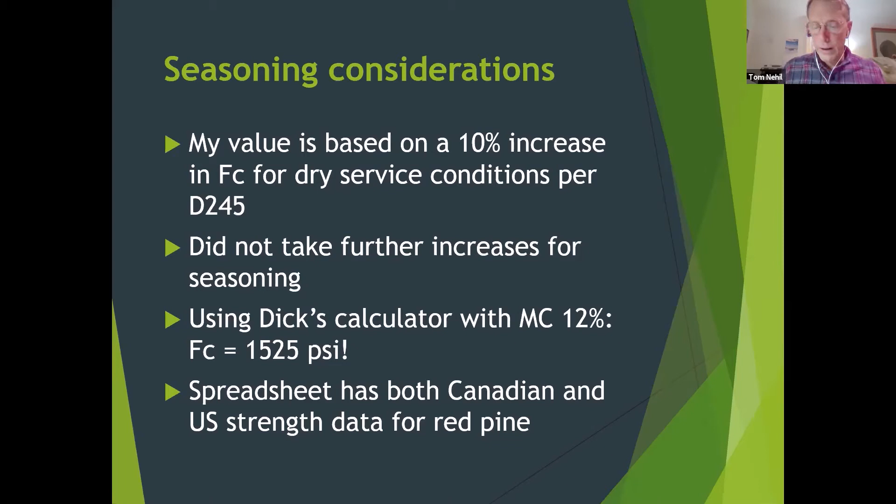They're really good. We didn't need to do it that time, but in any case, knowing that that's an option, I think is helpful for all of us. By the way, Dick's spreadsheet has both the Canadian and the US strength data for red pine. So you make that selection, it's your choice on which strength information you want to use to start your calcs.

So we can apply those moisture effects if we feel comfortable with the condition of the stick, that it hasn't developed defects. But you want to be looking at the stick, not just kind of arm waving. And so that's an in situ grading sort of decision. I think it'd be great if we did a little more work in TFEC to show seasoning effects for compression, for shear, and maybe bump up the ones that we're using for bending so far as well.

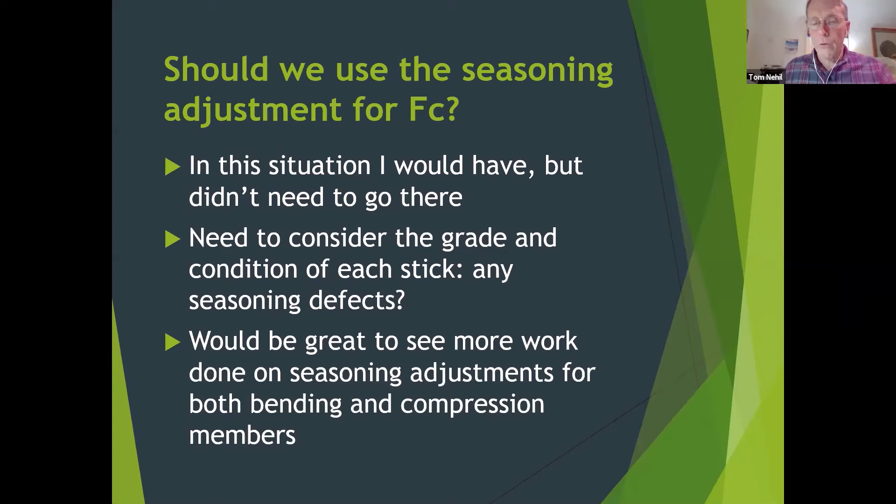So we'll wrap up the comments here, first of all, just to advise all of you, consider using TFEC 3 and D245 whenever you're evaluating existing timber. It's fast, it's easy. The equations look a little daunting at first glance, but it's a 1-minute calc. So great, use Dick's calculator, but know what you're doing. It's not gonna take care of any ignorance on your end. You need to be the one with the intelligence using the tool, and use judgment in applying the moisture C sub M effect, right?

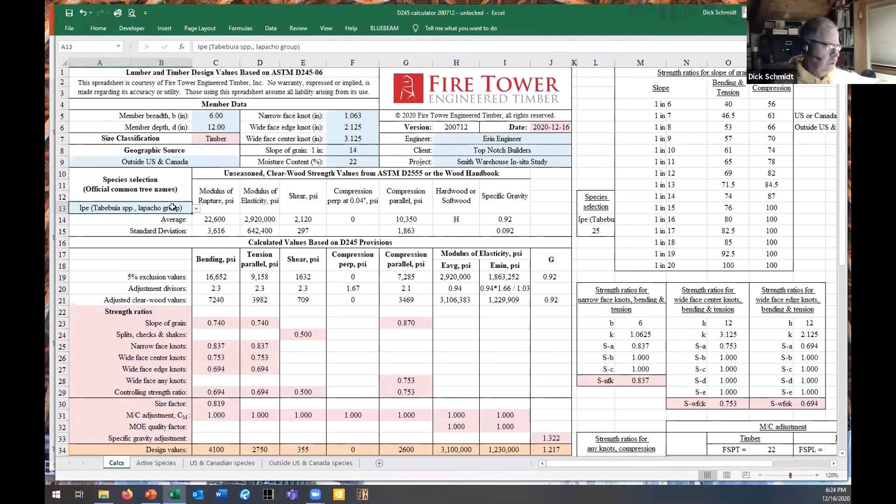So I've gone to under geographic source outside the US and Canada. There's the material. Average modulus of rupture is 22,600 PSI. And if you got a 6 by 12 stick of that, satisfying the WWPA Select Structural requirements, you can use 4,000 PSI for your bending stress at 22%. 12%, 5,700. We're joking here, okay? So keep that in mind, that there's some capability to the spreadsheet that we might not want to exploit.

But having shared the screen, let me go back to US and Canada. And I want to go to maple since Tom mentioned that. So if you have silver maple, the asterisk next to the name means this is the weakest in bending. This is a species with the lowest modulus of rupture for that genus. So the modulus of rupture for silver maple is 5820. If I have sugar maple, 9420. So this is where you really get the boost if you know exactly the material you're working with rather than just the genus.

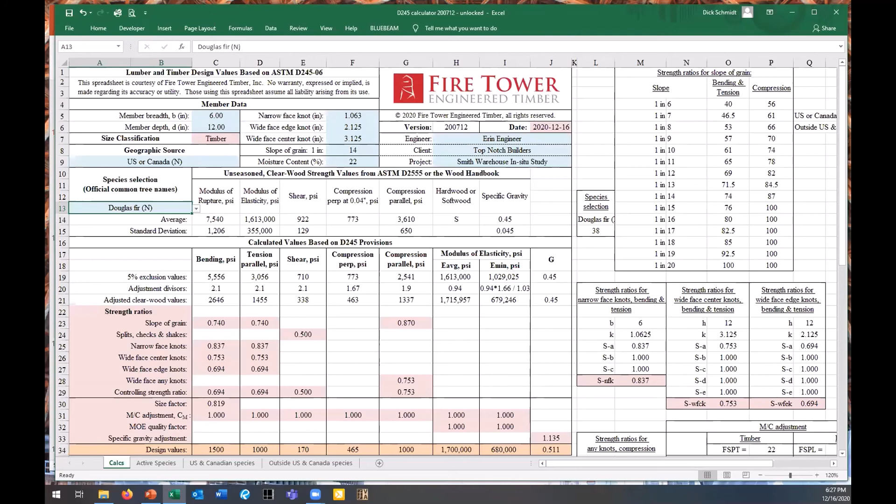So when I go to design in white pine number 2, we have what's called northern species, which is non-commercial junk species. And you can imagine what number 2 design values are. So when I design in northern number 2 for white pine, I call it structural butter. The piece sizes are ridiculous. But the interesting thing is that from the information I gleaned from the grading course and this spreadsheet that Dick has put together, my understanding of the values of the material we're using for bending members in particular has changed dramatically.

When I order a number 1 grade material and I can get it from certain mills, we're not getting number 1. We're getting this super structural that Tom was talking about. We're getting knot sizes on the 10-inch or 12-inch face that are, actually measured on the face, only an inch, inch and a quarter. And we're using boxed heart timber. So when you actually do the knot size on these things, these are 5/8 or smaller knots. Slope of grain on all the stuff we're getting that's 12 inches and wider is always way better than 1 in 16. It's like Tom said, it's pin straight.

And so when I'm designing stuff, we have a huge factor for piece size; when you get above 12 inches, we start taking a hit hard. But when I look at the strength of the material we've got using this calculator of yours, Dick, on a 12-inch white pine, and we measure the knot sizes and the slope of grain and the moisture content, we're way above select. So I've been over designing big pieces like purlins, summer beams, principal purlins. I've been over designing them for decades.

And it's amazing how much of a strength you can get from this. I mean, Tom, your one calculation showed a 40% increase because the moisture content was below 22%. This is a huge tool for consulting engineers and practicing timber frame engineers like myself. It makes a huge difference in terms of the way I approach materials.